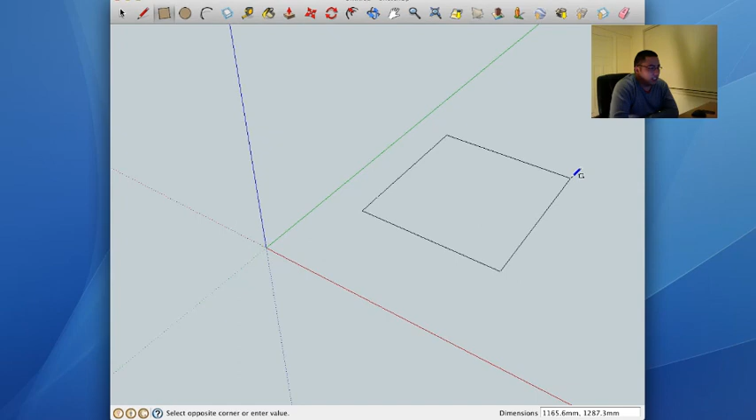You can see that it can be very difficult to get accurate. So once I've started dragging, I can actually type in 80mm, 80mm, and push enter, and then it'll draw that in for me.

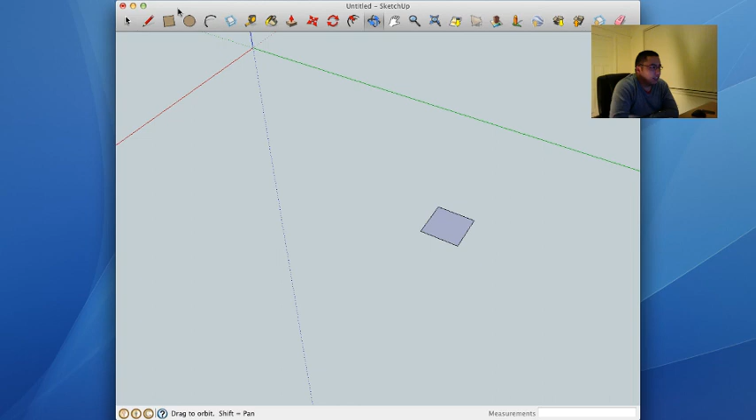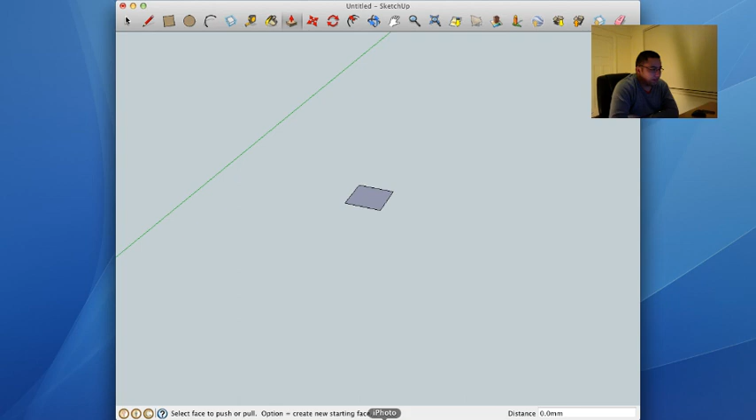The next step to creating my milk carton is to push and pull my milk carton so that it becomes three-dimensional. In order to know how high to pull my milk carton, I need to measure the height of my milk carton. So to do that, I need to have my orthographic projection drawing open, and I need to measure the height. You can see that my height is 120mm. So once again I'm going to click and drag, and then type in 120mm and push enter, and that'll pull that up to the correct height.

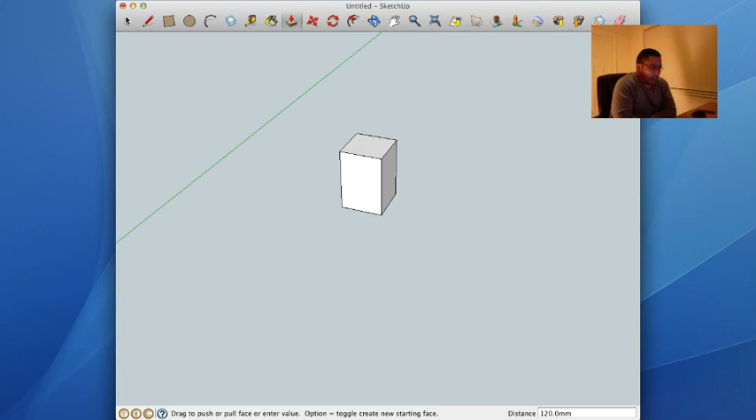The next step is to draw on the top of my milk carton. We can see that my milk carton top height is 30mm. So to draw in that, I need to find the midpoint of my milk carton, pull up against the Z axis, or the blue axis, to 30mm. Once again I can type in 30mm and push enter, and that will create a line that is 30mm.

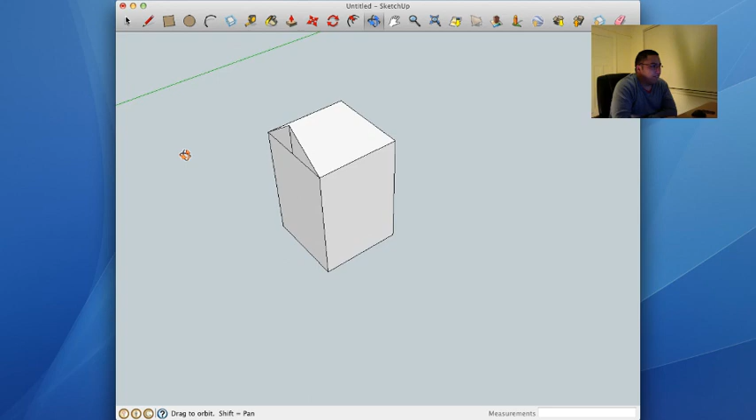From the end point, I then need to draw lines to the corner of my milk carton to create two identical triangles.

Once again, I'm going to repeat that on the other side. So finding the midpoint, drawing a vertical line up with 30mm, and then drawing to each corner to make two identical triangles.

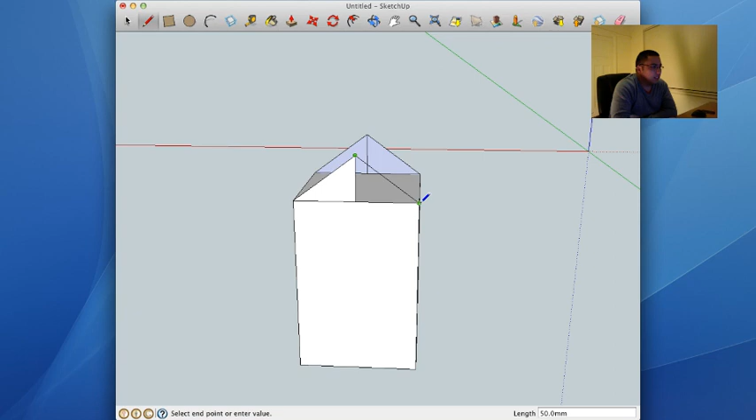And now I can erase those lines because they were guidelines, which are no longer needed. And using my pencil once again, I'm going to draw a line to join those two triangles together to create the top of my milk carton.

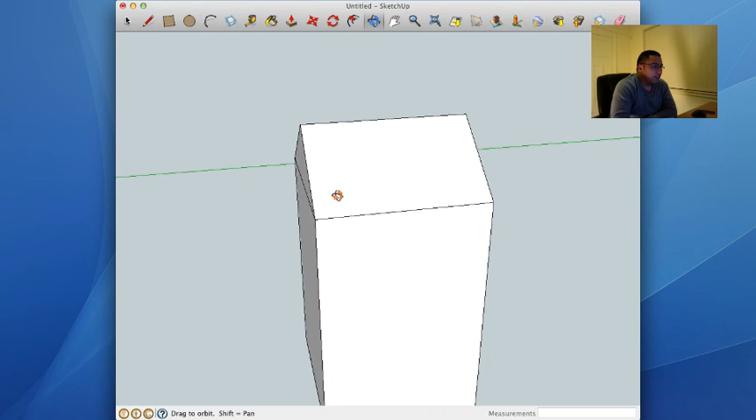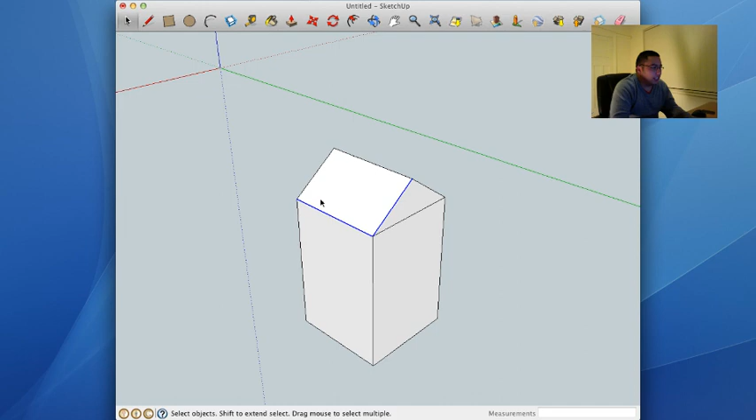Now we need to draw in the flaps for my milk carton. So in order to do that, I need to click on the arrow tool, hold the shift key, and click on each edge of the top of my milk carton.

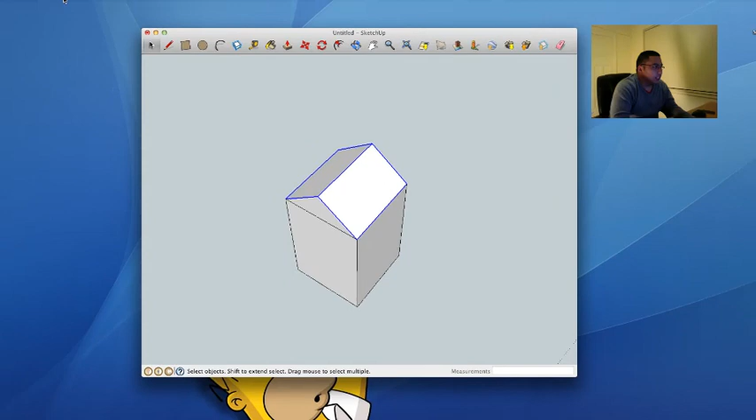So you can see that I have those two rectangles selected. What I need to do is go up to edit and then click copy, and using the arrow tool once again, just click anywhere else on my screen. Then I go edit and paste, and then I just click on my screen, and that's created that shape again for me.

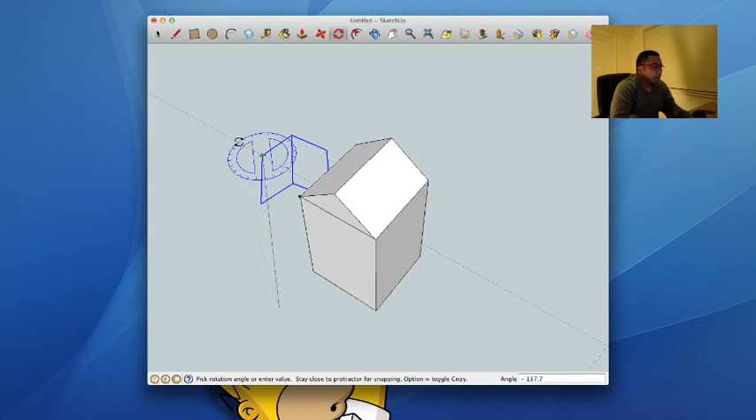What I now need to do is click on the rotate tool. I need to click on the corner of one of the rectangles, drag out my mouse, click, and I can rotate it. I need to rotate it 90 degrees, so once again I can type in 90 and push enter.

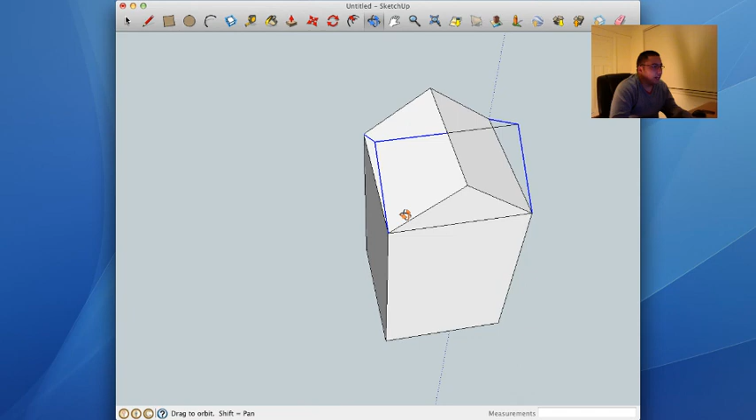Then I need to use my move tool. Click on the corner again and drag it to match that to another corner of my actual milk carton so it perfectly fits on.

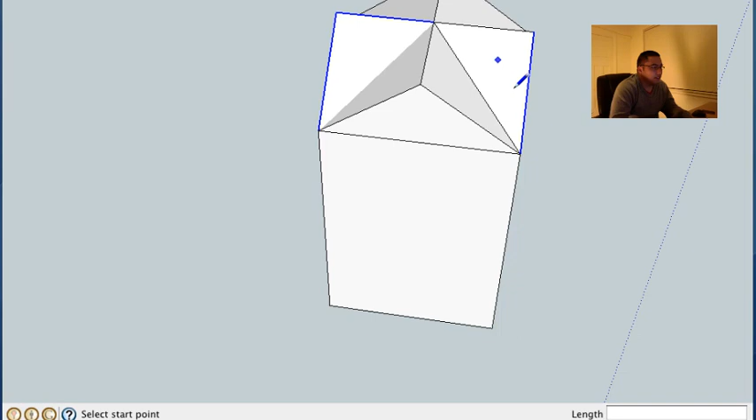Then what I need to do is, using my pencil tool, from the point where they intersect, I draw a line to each corner. So I should be drawing 4 lines all together.

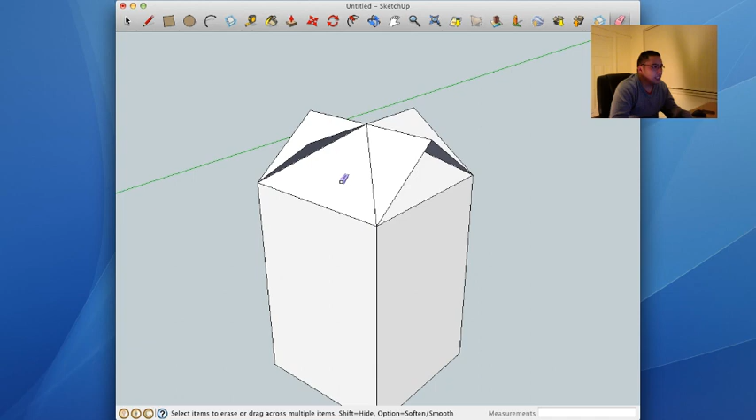See how that's created my flaps now for my milk carton. So what I now need to do is erase my unwanted lines.

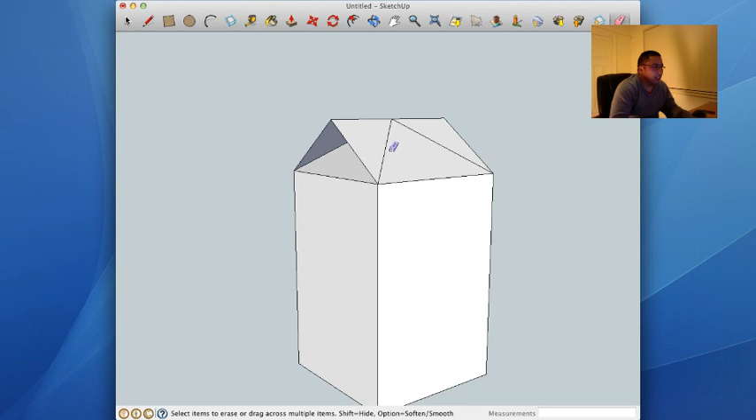And that's how you create your milk carton. Unfortunately, if I erase this line here, it's going to remove a part of my milk carton. So I need to keep these 2 lines on each side on my drawing, but we'll cover those up later when we start designing the labels for our milk carton.

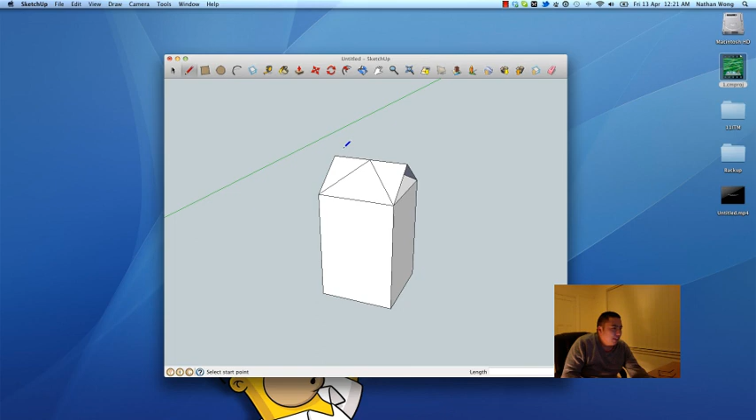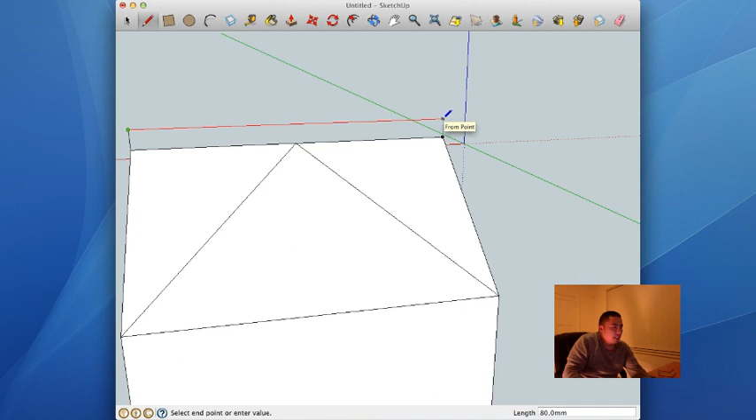The last step to creating my milk carton is I need to put the top flap on. So to do that, I just click on the corner, draw a vertical line upwards, type in 5mm, push enter, hover over to the last endpoint, hover up so that line is straight, and draw straight down.